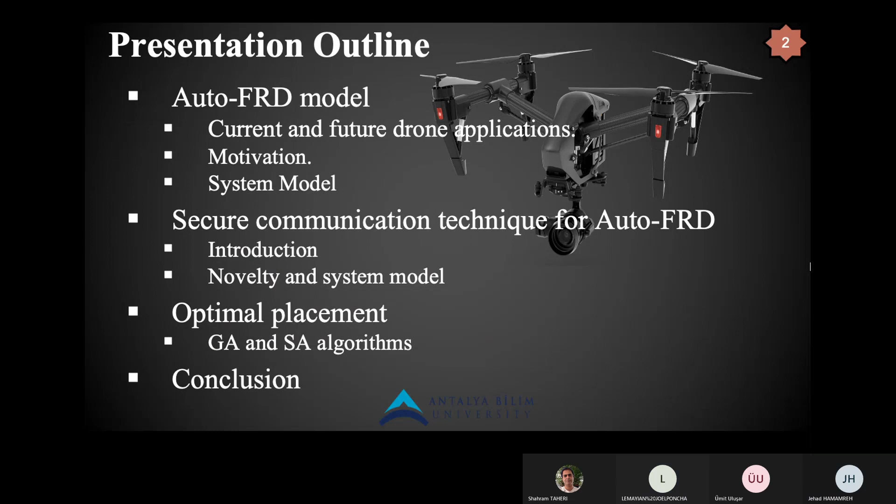Drone technology has become very popular in the recent past, especially. It has been utilized in areas such as surveillance, photography, and filmmaking - it specifically has revolutionized this area. Also, drones have been used in tracking; for instance, in national parks, they have been used to track animals, especially endangered species, so people know exactly where they are at all times.

They've also been utilized in goods delivery, including medicine. Amazon is one of the biggest investors in these goods delivery drones, where they deliver their packages using drones.

In 2020, drones have also been utilized in the fight against the pandemic, and they came in quite handy. A new term arose in 2020 called pandemic drones, which are basically drones used to fight the COVID-19 pandemic. They have been used to spray disinfectants in parks, for making announcements in streets, to send medical supplies to patients, hospitals, and areas which are difficult to access, and drones equipped with thermal cameras have also been used to take temperatures of people.

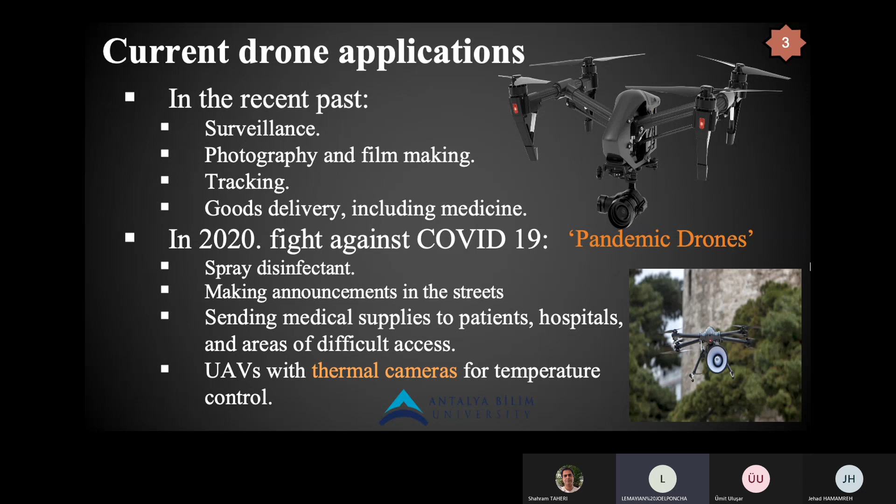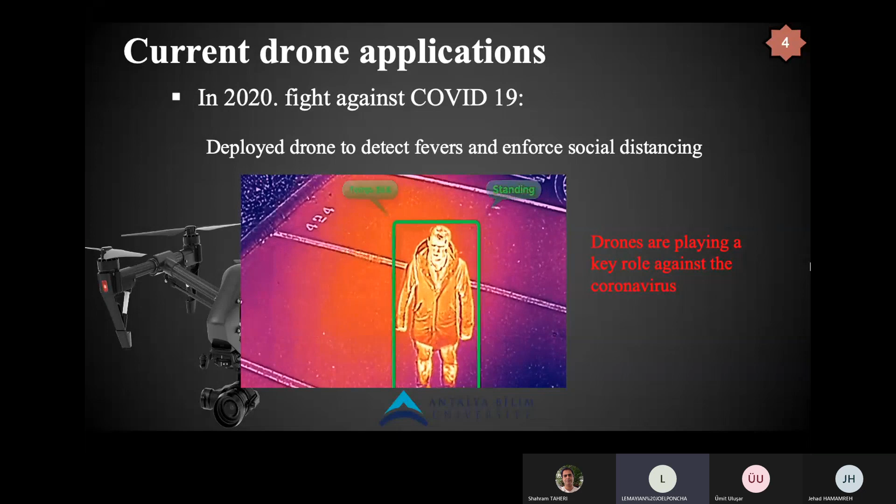All these have been used because people are trying to exercise distance, as the virus is quite contagious. In this picture, you can see a drone that has been deployed to detect fever and also enforce social distancing. Therefore, in 2020, drones have played a key role in the fight against the coronavirus.

In the future, drones are also projected to be utilized in different areas. For instance, taxi drones are one of the main areas where drones will be utilized. Specifically, last week General Motors entered the race, developing a prototype taxi drone, a 90 kilowatt-hour battery-powered personal aircraft. Other major companies hinting at investing in this area are Hyundai and Aston Martin. This shows that drone technology is actually a multi-billion-dollar industry.

Other areas where drones will be applied in the future are base stations. They will probably be used as base stations for 5G and 6G access, to provide better coverage for wireless technology.

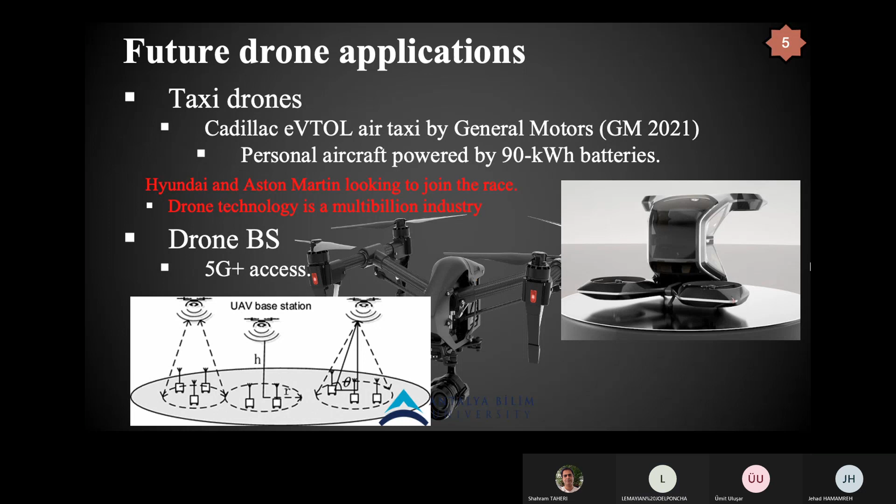So why have drones become very popular, or why are industries looking to invest in drones? This is because drones have many merits, including low cost, safety, expandability, lightweight, and their ability to execute tasks in a very short time. We have realized this ability of drones, and we're going to exploit their benefit to provide a first responder UAV system for critical situation management, or in other words, an Auto-FRD system.

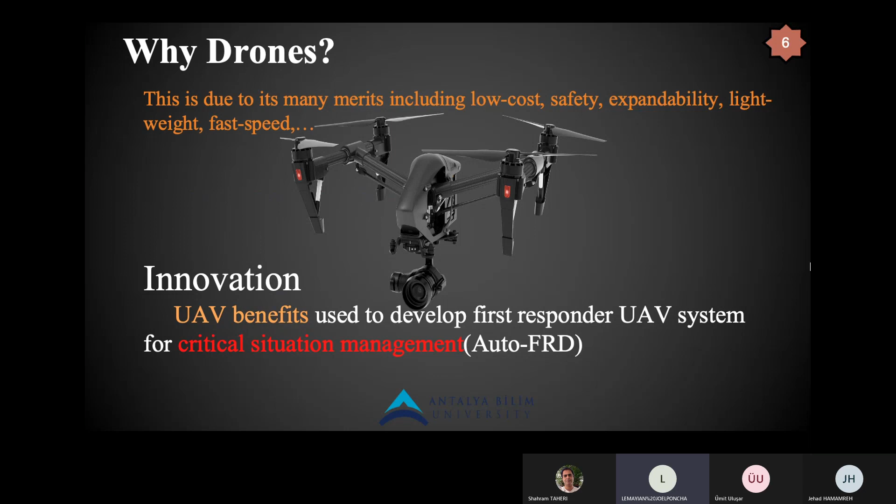So why do we need an Auto-FRD system? The World Health Organization stated that in 2014 we had 54% of the world's population living in urban cities, up from only 34% in 1960. It also expects that between 2020 and 2025 this population will grow by 1.63%, and between 2025 and 2030, urban population will grow by 1.44%.

The United Nations also corroborates this, saying 55% of the world population currently live in urban areas, and by 2050 we're going to have 68% of the entire world population living in urban developments. This is going to pose so many challenges, such as insecurity, high traffic, poor air quality, waste management problems, and others. Crowded cities will experience these and more challenges. Therefore, this Auto-FRD system will reduce response time to critical situations, helping us in crowded populated cities to save lives as well as property.

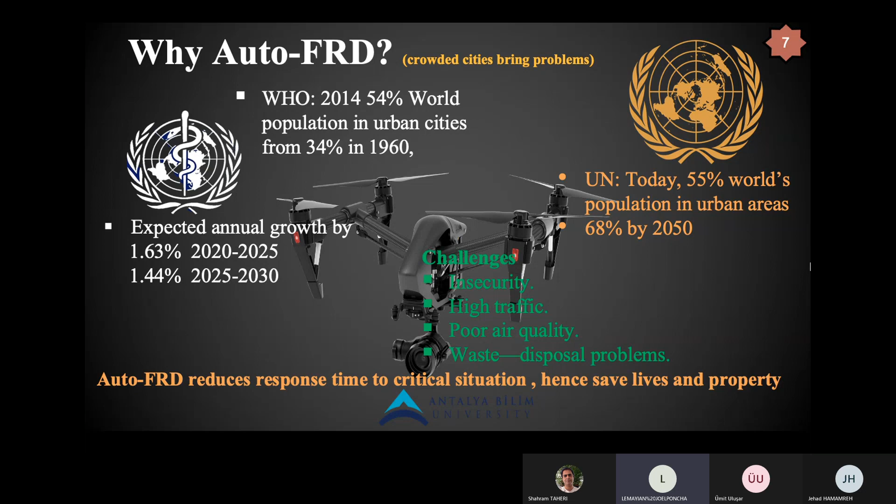So areas where Auto-FRD can be used include significantly reducing this response time in situations like terror attacks, such as those that happened in Kenya, New Zealand, and other parts of the world, fire accidents like the fires that ravaged Australia last year and the US as well, and responding to explosions, including gas explosions and chemical plant explosions.

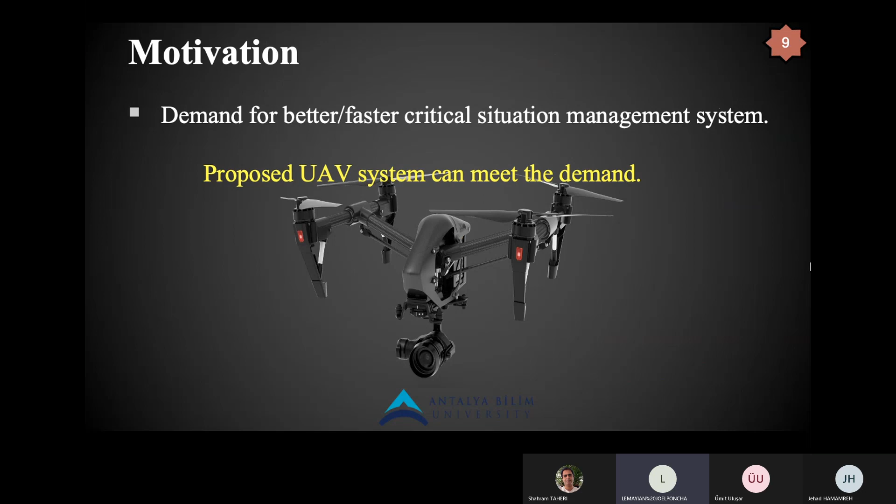So the motivation behind this Auto-FRD system is that there is a really high demand for better and faster critical situation management systems. Therefore, this proposed UAV system will meet those demands.

Some related works that have been done, close to the proposed system, include drones used in search and rescue in collapsed buildings to search for survivors. Drones have also been used in chemical plants, and in medical applications to deliver urgently needed medical equipment and drugs to areas which are hard to access. They've also been used in accident scene mapping, to get a complete look of an accident that has already occurred.

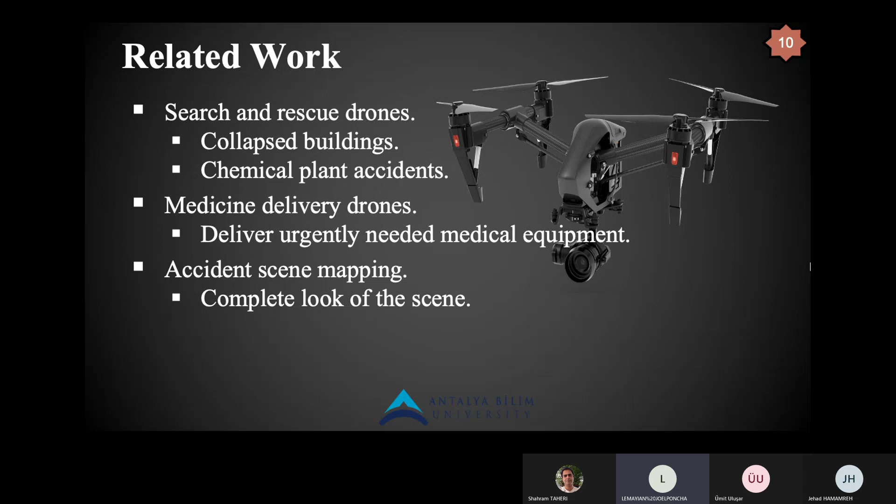Sensors are installed in the streets, and when they observe this kind of accident or critical situation, they immediately send a signal to the drones, which will arrive there within minutes or seconds.

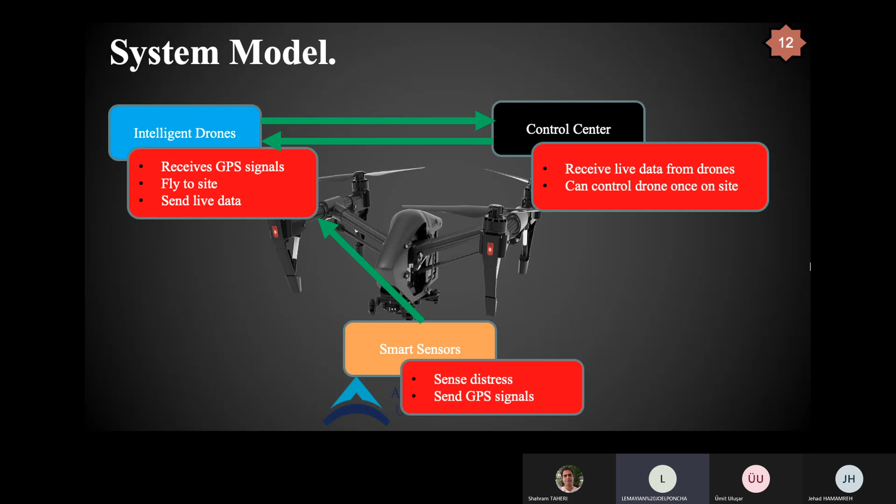This system model is made up of three major areas: the intelligent drones, the control center, and the smart sensors. The smart sensors sense a distress signal and send the GPS signals of the precise location to the drones. Upon receiving the GPS signals, the drones fly directly to the site and send live data to the control center, who receive the live data from the drones, control the drones, and coordinate rescue services with authorities.

This model is implemented using LoRa technology, a communication system with around 5 kilometers range in urban developments and around 30 kilometers range in rural areas. This system uses free and unlicensed frequency. In Europe, for instance, it uses around 868 megahertz; in North America, it's 915 megahertz; and in Asia, it uses 433 megahertz.

We also implement this system using ESP32 and RFM95 modules, which are cheap, use low power, are compact in size, and have low complexity. These are very desired qualities, especially for Internet of Things applications.

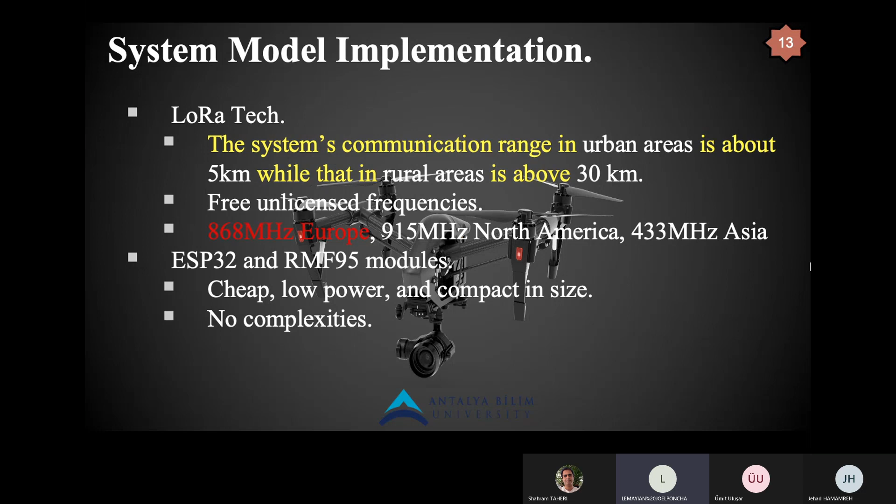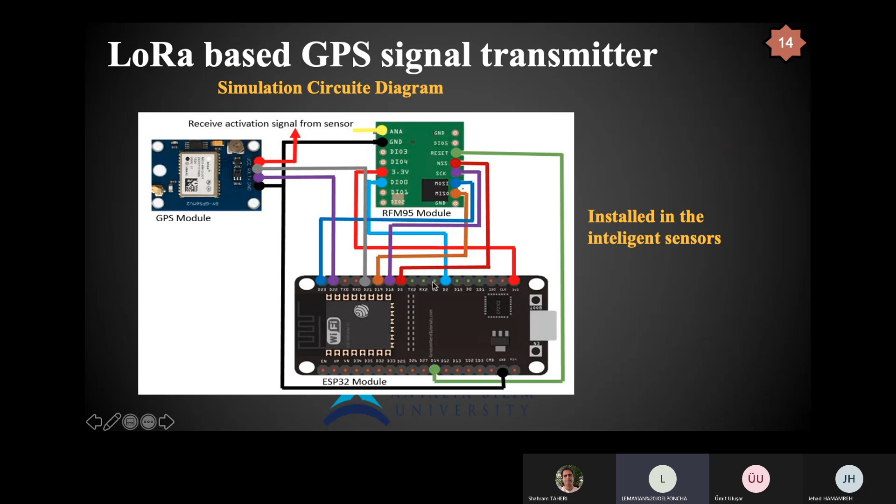So this is the simulation circuit diagram for the transmitter. As you can see here, we have the GPS module. This transmitter is installed in the sensors. And here you can see the simulation circuit diagram for our receiver, which is installed in the drone.

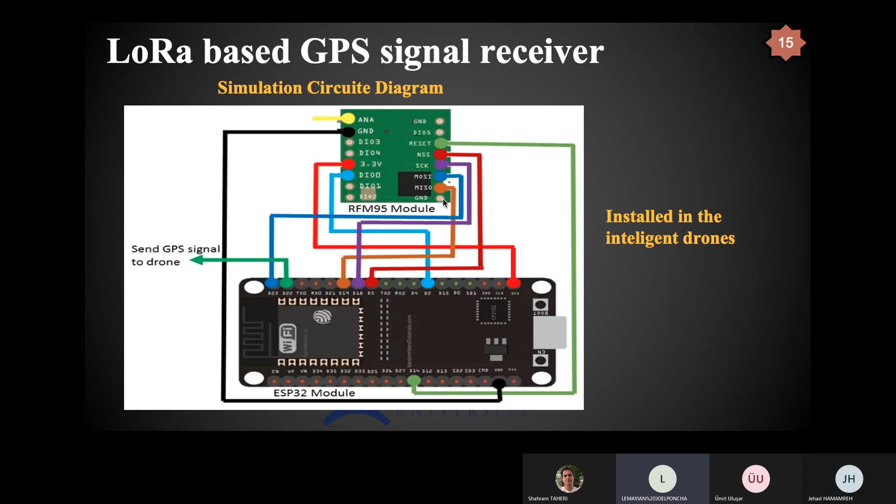Here you can see the practical circuit implementation where we actually implemented those previous two circuits. On the left here, you can see the transmitter, which is put on the sensors, and this is the receiver, which is implemented on the drone.

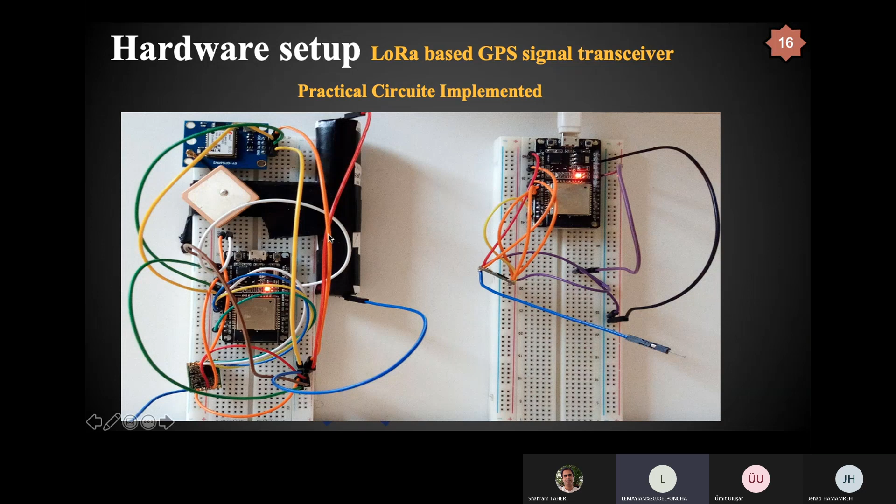So we implemented these two transmitters and receivers, and we tested them. We put them in different locations to test how the communication system works. We chose the locations according to line of sight. For instance, location A, we chose because we had line of sight. We chose location B because it has the most dynamic environment. And we chose location D because of the non-line of sight as well as the distance.

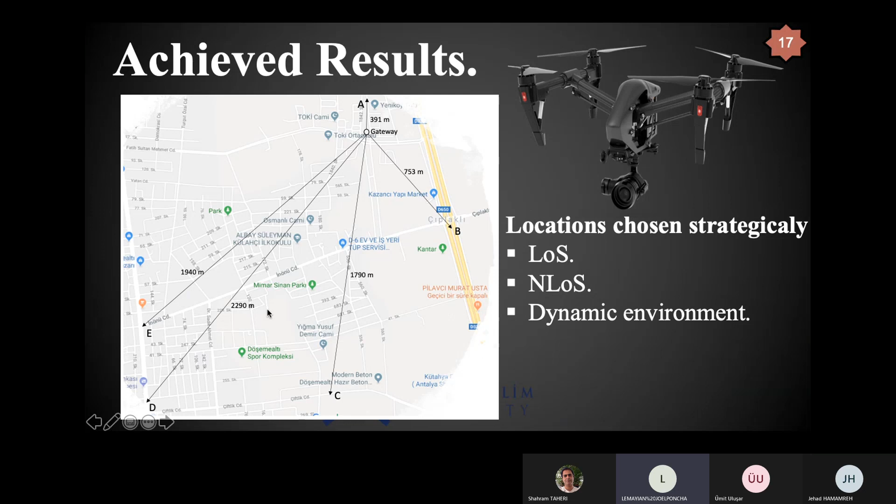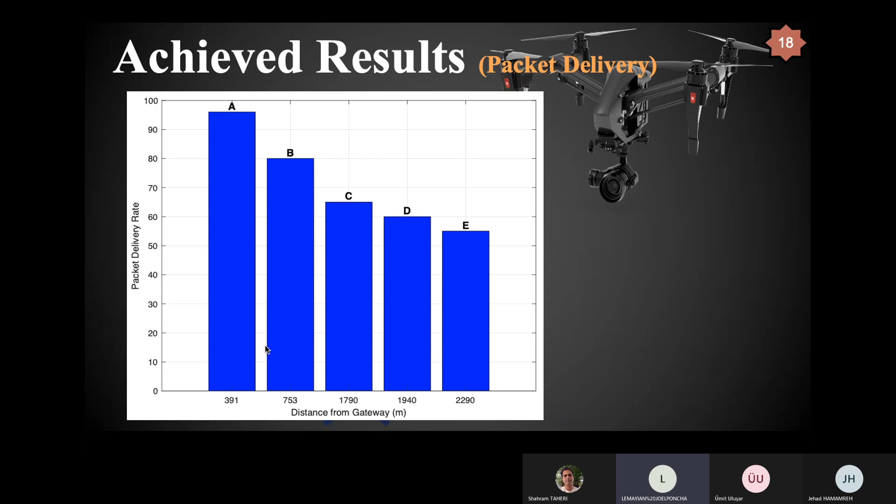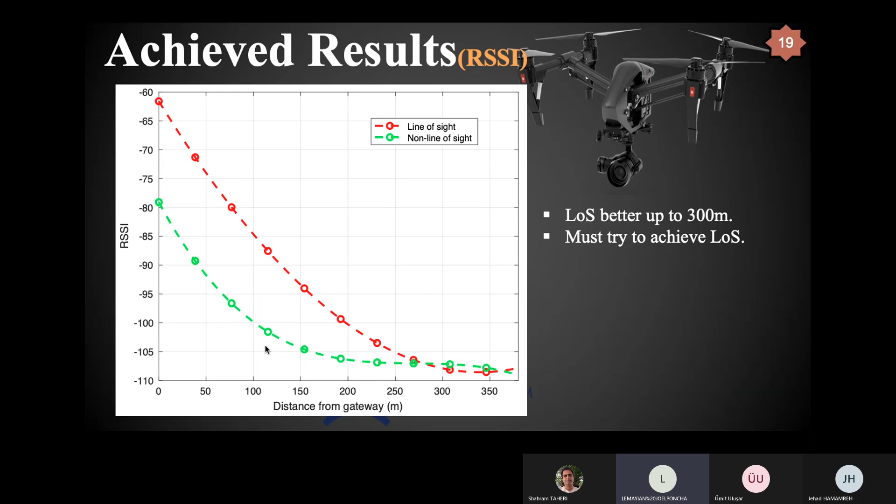We also tested the received signal strength for line of sight and non-line of sight, and as we can observe here, we have a better signal strength when we have line of sight.

So now we did a case study for comparative results. We did this case study for the city of Istanbul, which has a size of 5,343 kilometers square, with a population of about 15 million people. We did this case study by considering, for instance, a common response to a fire accident by the fire trucks. We took parameters such as the traffic and time of day in Istanbul, the speed of the fire truck, as well as readiness and distance covered.

As we can observe, this Auto-FRD system performs significantly better than the conventional fire truck system being used in Istanbul, by significantly reducing the response time to a fire accident.

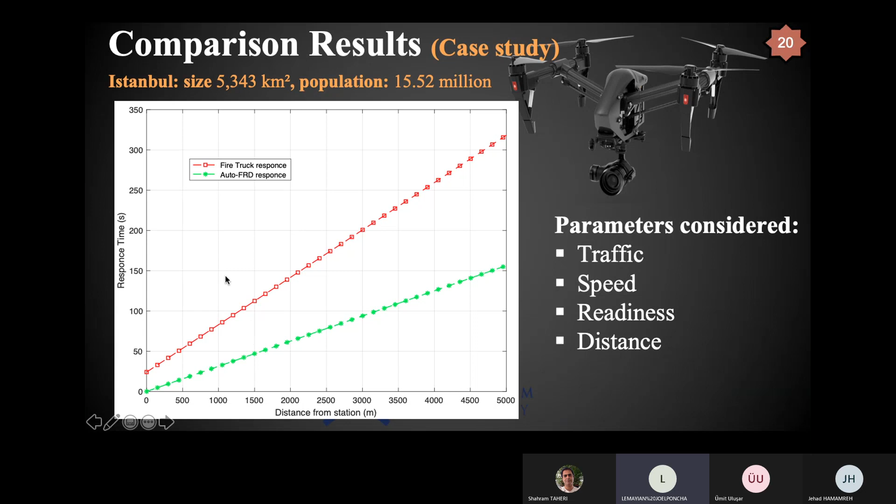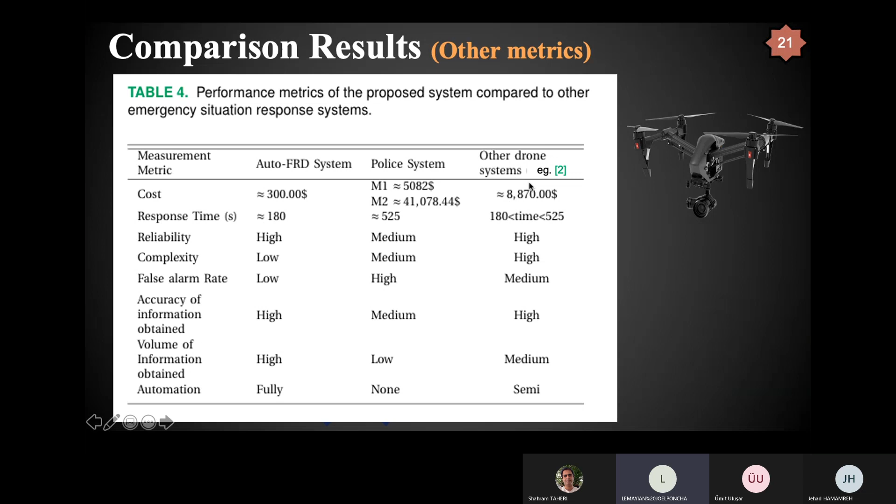We also looked at some other metrics and compared this particular system with other metrics used, for instance, to reduce the response time to a critical situation by the police and by other drone systems. We compared metrics such as cost, response time, reliability, as well as accuracy. We can observe that the Auto-FRD system performs significantly better than all these other methods to reduce the response time.

So for the achieved results, we have seen that the Auto-FRD system, with a drone which has 32 meters per second speed, is able to get to a place 5 kilometers away in under less than 3 minutes.

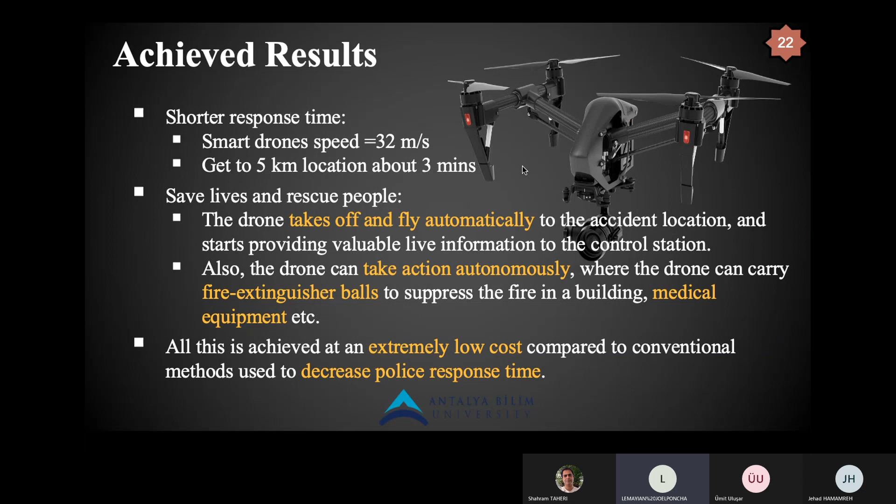This system can also be used to save lives in that the takeoff is automatic, and it automatically takes off and arrives at a particular location, providing the much needed services within no time. They can also be used to deliver services such as fire extinguisher balls and urgently needed medical equipment. All this can be achieved at an extremely low cost compared to conventional systems used to decrease police response time.

So now we look at the novel wireless communication technique used for Auto-FRD, because we need to have a secure communication system. In implementing drone technology, security is one of the biggest concerns to developers, because you will want to have a secure drone paradigm. You don't want the information being collected by the drones, or any hacker, to take over your drones, because that's not going to be good. The information is too sensitive. Therefore, security is one of the major concerns in developing drone technologies.

And to do that, we look at non-orthogonal multiple access communication technique, or NOMA, because it is one of the most promising communication techniques for the future. NOMA is considered a promising technique for future communication because of its ability to serve more users than available resources. This is essentially important because of the high number of devices, especially in this era of Internet of Things, since resources will be limited while the number of devices will be higher. NOMA is also good because it provides high spectral efficiency, low latency, improved coverage, as well as massive connectivity. All these are important qualities for Internet of Things and the 5G plus era.

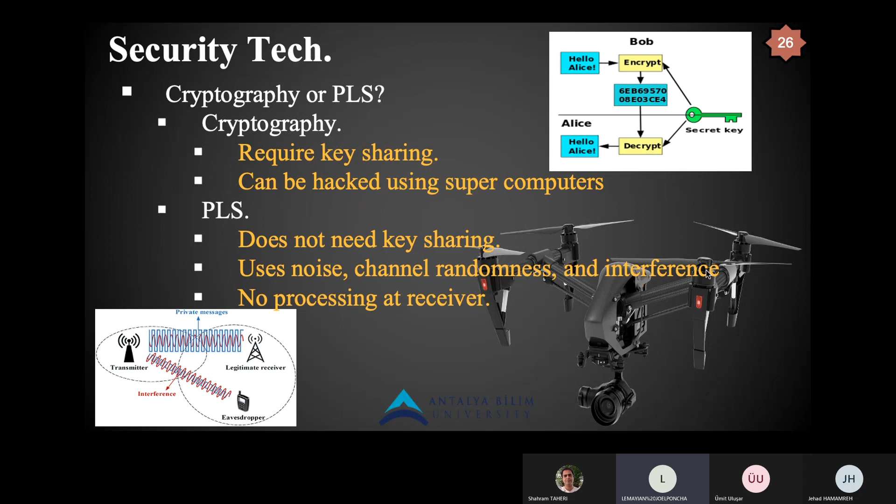It also has no processing at the receiver. It requires no processing at the receiver.

Looking at NOMA and the communication and security techniques as well, we came up with a new non-orthogonal transmission communication technique with enhanced physical layer security against internal and external eavesdroppers, that can be used in, for instance, drone communication to safely implement the communication system of our drone technology.

So what we do is we do this in rounds, where in the first round we have antenna 1 active and antenna 2 inactive. And in the second round, we have antenna 2 active and antenna 1 inactive.

So what we do is we calculate an R signal, basically we call it an auxiliary signal, based on the channel between the transmitter and the receiver. And then we superimpose it with user 1 data plus user 2 data, and we transmit it, for example, in round 1 transmission.

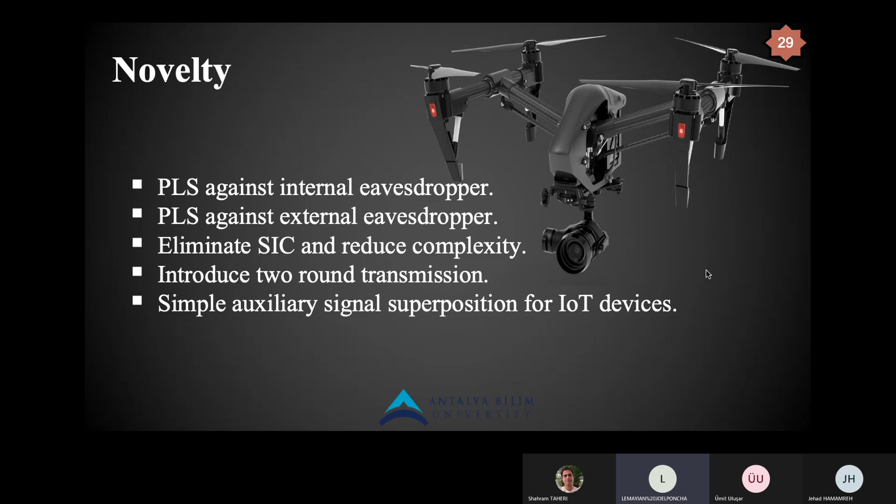We also introduced two-round transmission, and simple auxiliary signal superposition, which are also simple for Internet of Things devices.

So how do we implement this novel wireless communication technique? At transmitter 1, for example, we have user 1 data as x1 plus user 2 data plus the auxiliary signal calculated from the channel between the receivers and transmitters.

And then on the second round, we transmit this signal again, which is user 2 data plus user 1 data plus an auxiliary signal.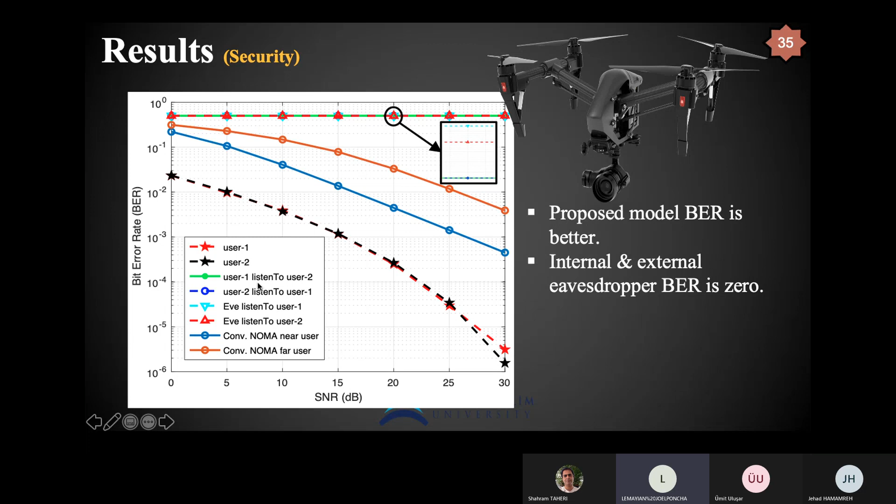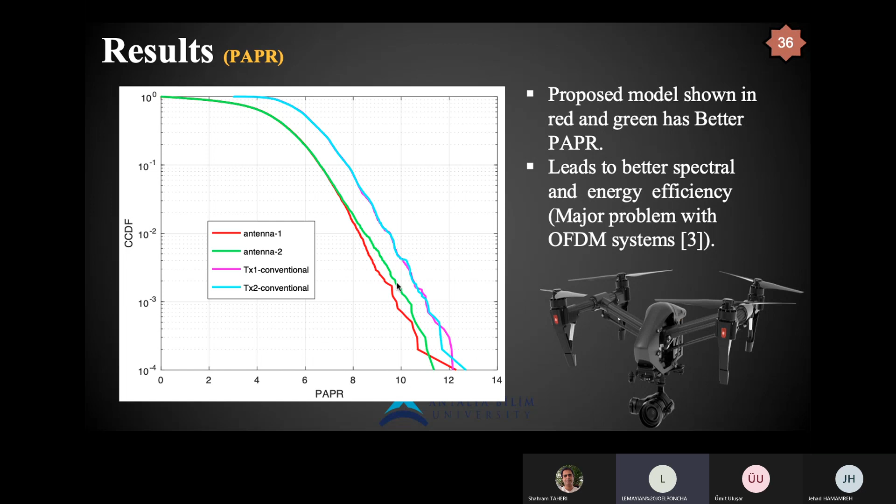We also analyze the peak to average power ratio of our communication technique. And as we can see, we observe that our proposed model basically has better peak to average power ratio. Good peak to average power ratio leads to better spectral and energy efficiency, and it also solves one of the major problems experienced by OFDM systems.

We also check the throughput of our proposed system and compare it with single input, single output system and single input, single output system utilizing dual antennas. And as we can observe, the proposed model, user 1 and user 2, performs better, has better throughput at lower SNR. We can also observe that Eve has completely bad throughput. Internal and external eavesdroppers have completely bad bit error rate or throughput.

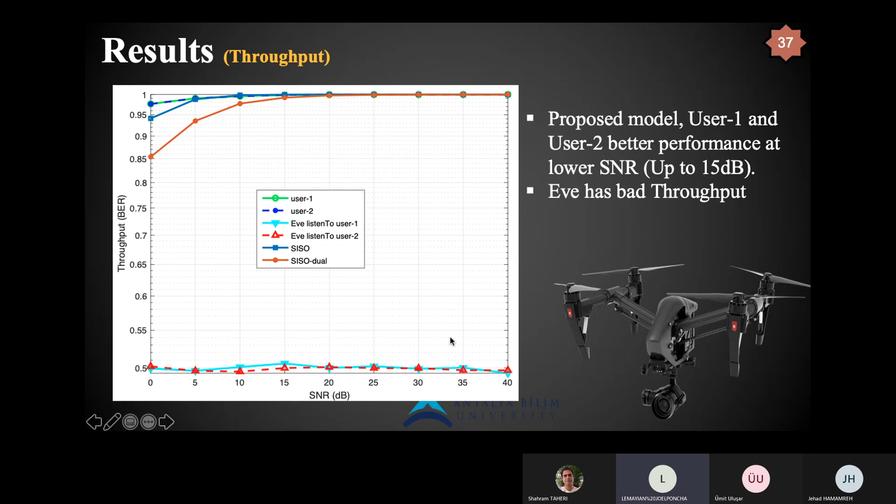So now we test the robustness of our system by simply looking at how it performs when we have an imperfect channel. Why do we do this? Because our communication system, in practice, is not perfect. Therefore, we test how our system will perform when we have an imperfect channel.

We do this by simply injecting independent additive white Gaussian noise. And as we can see, as our imperfect channel becomes more imperfect, or as we increase the imperfectness of our channel, so does the bit error rate degrade. But we can see that even with an imperfect channel, our system still performs better than conventional far NOMA.

Conventional far NOMA user and near NOMA user. However, we have algorithms that can be used in order to increase channel estimation and hence avoid this imperfect channel experience.

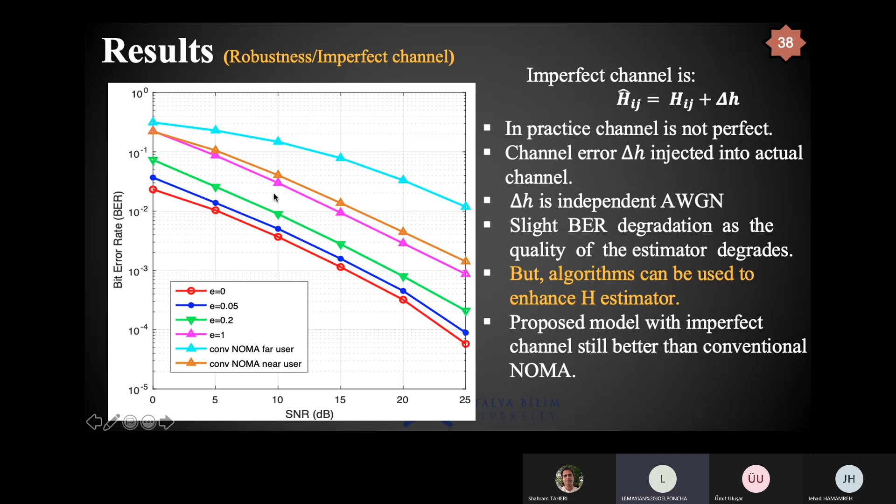So now we look at the optimal drone placement problem. So why do we need to consider this problem? Because right now we have larger cities, and once you have this particular system all set up, your main question now will be where are you going to put these drones so that they will be able to serve an entire city. Even in the future, we're going to have mega cities which are going to be much bigger than currently available cities.

Therefore, we need to find optimal positions as well as optimal number of drones, considering the constraints, because the drones have constraints such as coverage. They have limited coverage, limited power, as well as communication range. Therefore, we need to consider those constraints to make sure that the UAVs are able to cover a given area or a given city with minimum resources, and this also helps us lower the cost of implementing this particular system.

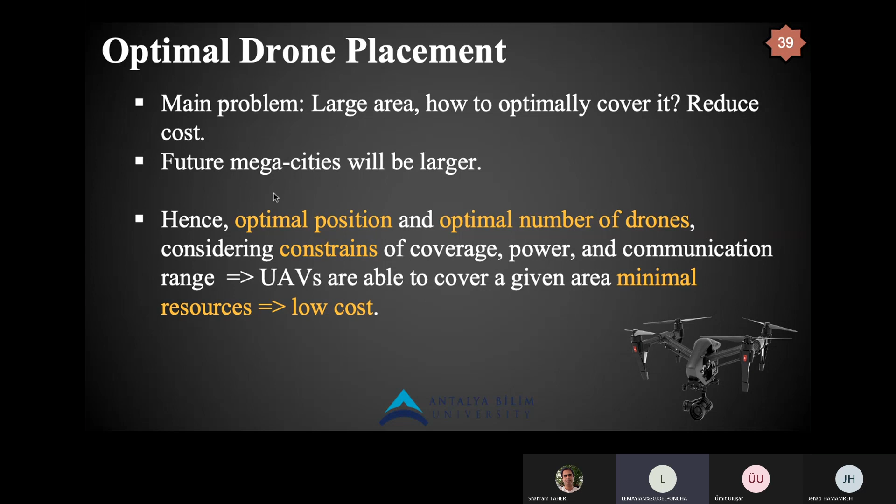So by doing that, we utilized two meta-heuristic algorithms: simulated annealing and genetic algorithm.

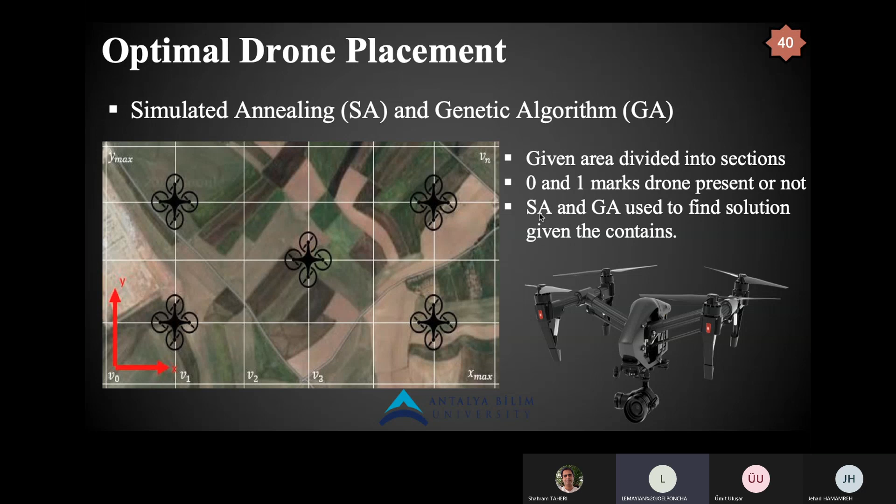So what we did is, given an area, for instance, like a smart city, we divided it into a number of squares depending on the coverage properties of our drones. Then we indicate the presence or absence of a drone in a square by a 0 or a 1, and we use simulated annealing and genetic algorithm to try and find an optimal placement and an optimal number of drones that will cover the whole city given the constraints of the drones.

After utilizing these two meta-heuristic algorithms, we realized that simulated annealing can easily get stuck at a local optimal value. Therefore, using simulated annealing, it's very easy to not get an optimal value but get a local optimal value instead. We also realized that it takes a long time for simulated annealing to converge towards an optimal solution. On the other hand, we found that genetic algorithm is much better, because you get a higher probability of reaching a global optimum value.

Some of the challenges we face using this system: GPS signals are not very reliable because they are affected by weather elements such as rain or cloudy weather. They are also blocked by trees and by buildings. However, we can use a network of satellites that connect to the GPS signal, and also other technologies such as optical flow in order to get a precise location of a critical situation.

Also, we have another challenge, which is loss of packets. As we saw, there is a chance that we are not able to get all the packets, since they are affected by non-line of sight as well as distance. We can solve this by using MIMO systems to increase the paths, which will help us increase the packet delivery rate.

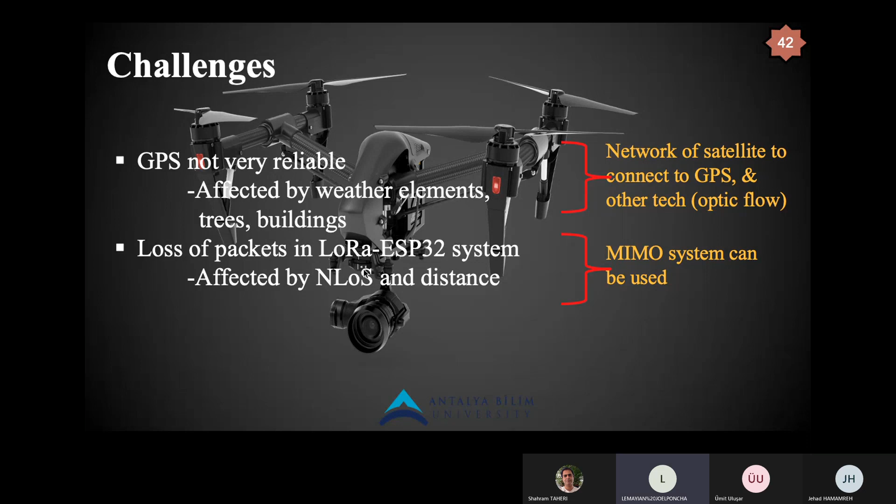So to conclude and give you future work, we have seen that the Auto-FRD system is a novel idea that can save lives as well as property by significantly reducing response time compared to conventional systems. Also, we've seen that the system is low cost as well as secure.

We also came up with a secure, resilient, and effective, as well as low complexity wireless communication scheme, which uses physical layer security to provide zero information leakage for internal and external eavesdropping. The simulation results also indicated that the system is actually secure with low complexity, which is very good for Internet of Things, and it's also better than conventional techniques.

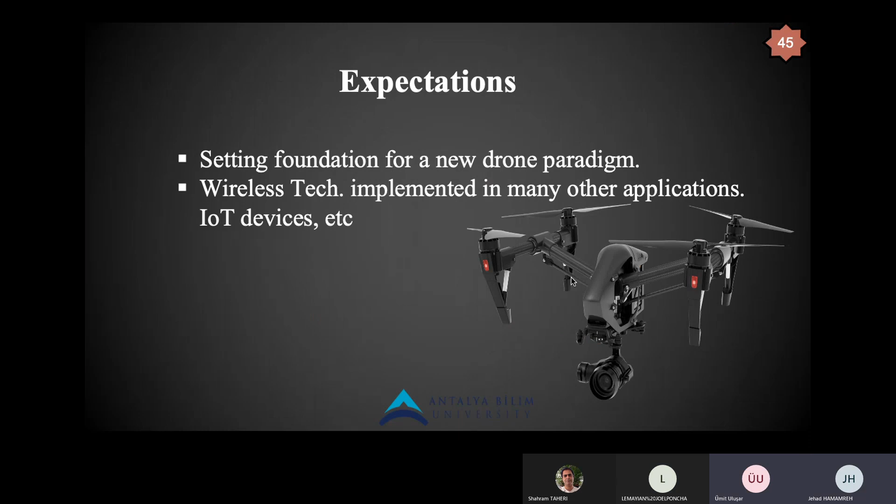One question that I can ask is, for the optimal drone placement, you compared a couple of algorithms, genetic algorithm and the other one was simulated annealing, I guess. For these experiments, did you consider some obstacles, or how did you do these experiments?